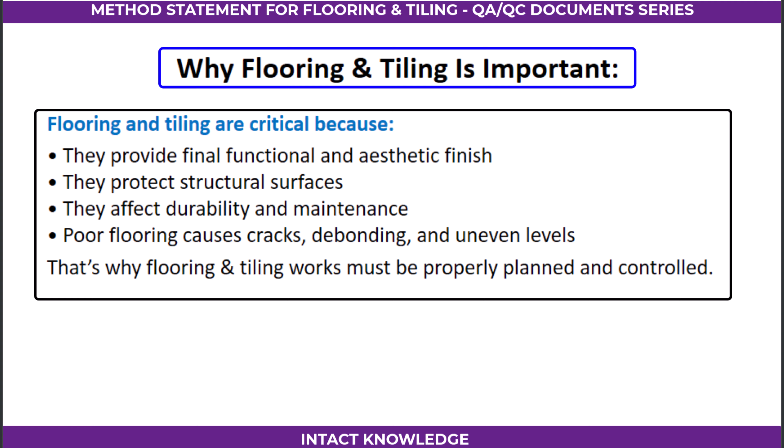What is a method statement? A method statement is a written document that explains how a construction activity will be carried out, sequence of work, safety and quality controls, responsibilities of personnel. It ensures controlled and safe execution of work.

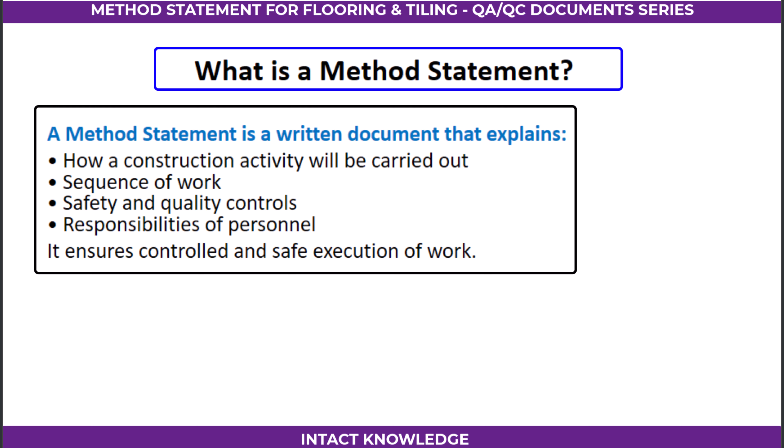What is flooring and tiling? Flooring and tiling is the process of installing ceramic, porcelain tiles, marble, granite, vinyl, other specified finishes on floors and walls to achieve durable and level surfaces.

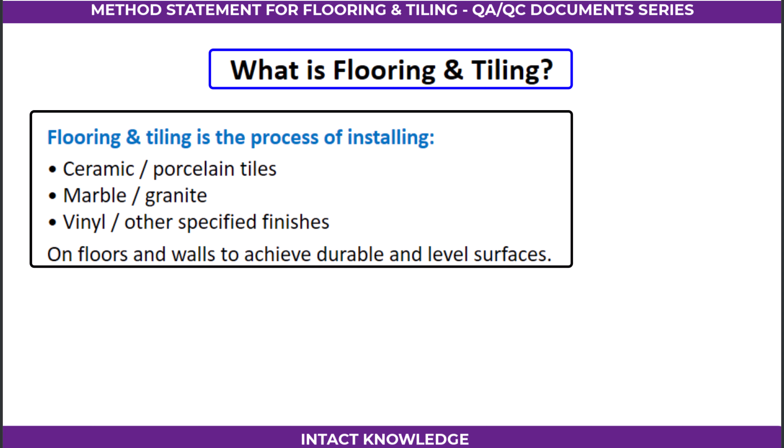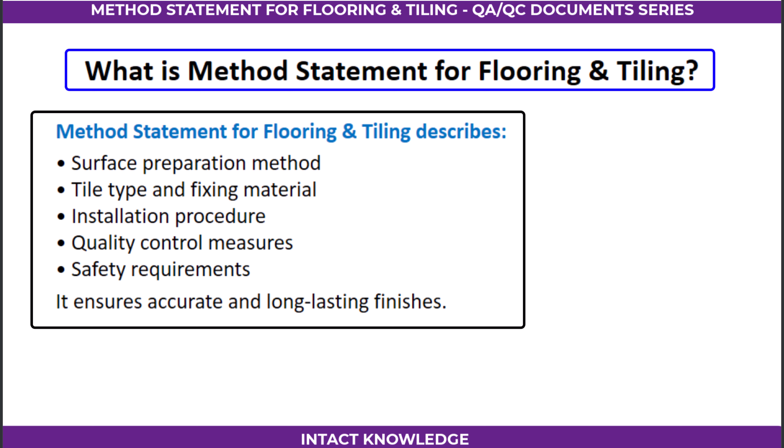What is method statement for flooring and tiling? Method statement for flooring and tiling describes surface preparation method, tile type and fixing material, installation procedure, quality control measures, safety requirements. It ensures accurate and long-lasting finishes.

Objective of flooring and tiling method statement. Main objectives are achieve proper level and alignment, ensure strong bonding, maintain uniform joint spacing, prevent cracks and hollow sounds, meet project specifications.

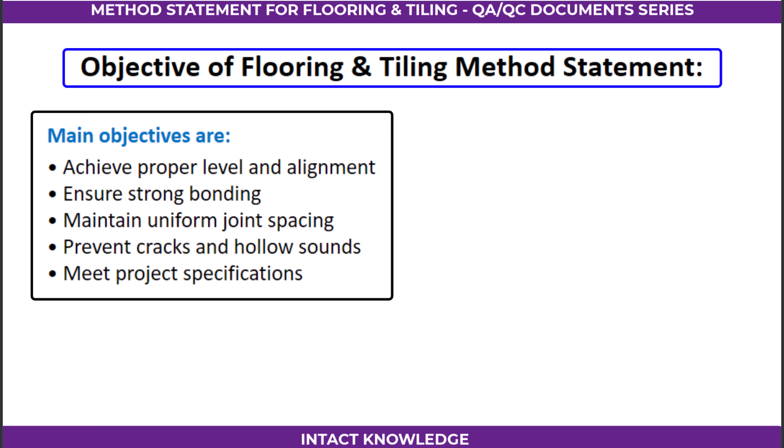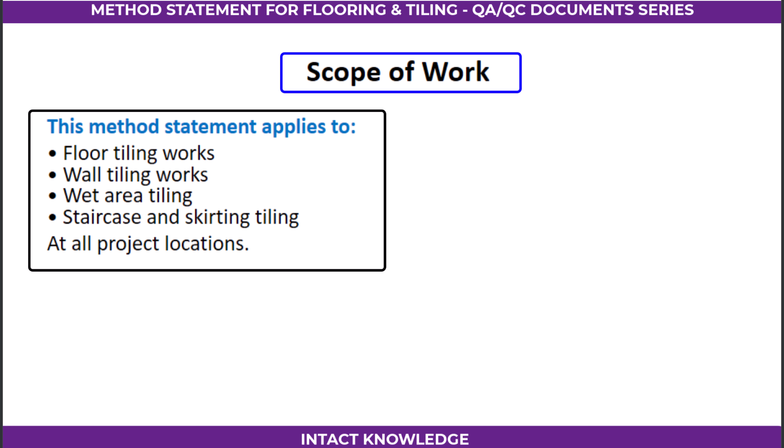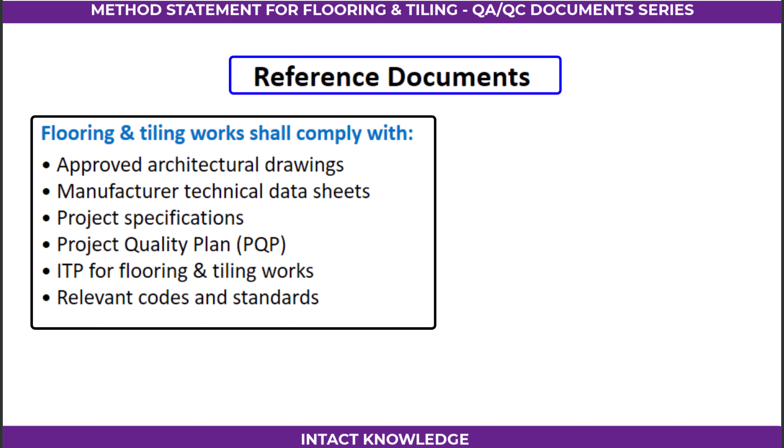Scope of work. This method statement applies to floor tiling works, wall tiling works, wet area tiling, staircase and skirting tiling at all project locations. Reference documents. Flooring and tiling work shall comply with approved architectural drawings, manufacturer technical data sheets, project specifications, project quality plan, PQP, ITP for flooring and tiling works, relevant codes and standards.

Responsibilities. Responsibilities include project manager, overall coordination; site engineer, execution and supervision; QA/QC engineer, inspection and compliance; safety officer, safety monitoring; flooring tiling supervisor, work control.

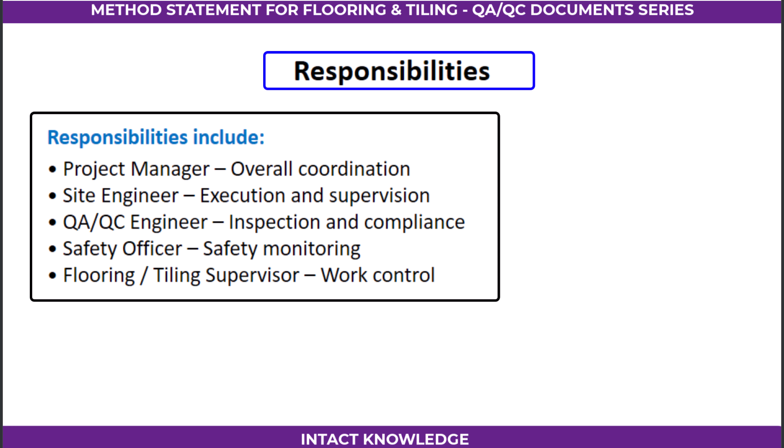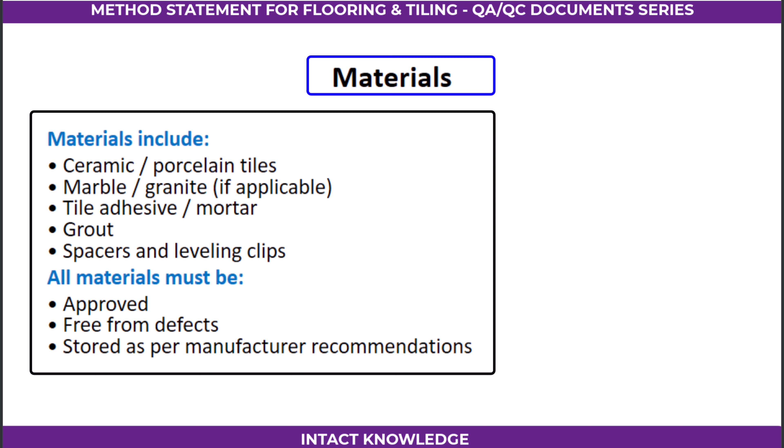Materials. Materials include ceramic porcelain tiles, marble, granite if applicable, tile adhesive mortar, grout, spacers and leveling clips. All materials must be approved, free from defects, stored as per manufacturer recommendations. Plant and equipment. Typical equipment used: tile cutter, mixing tools, trowels and floats, spirit level and straight edge, rubber mallet. All equipment shall be inspected, clean, safe to use.

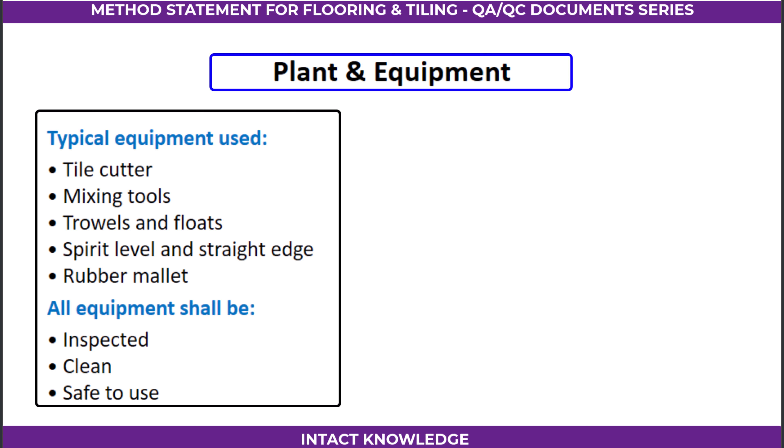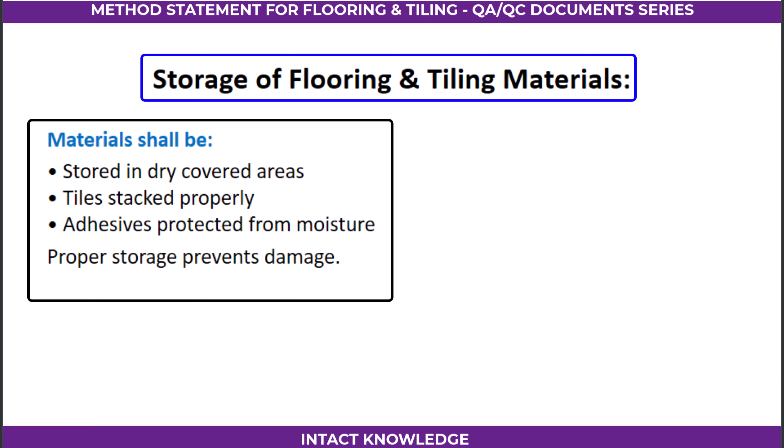Storage of flooring and tiling materials. Materials shall be stored in dry covered areas, tiles stacked properly, adhesives protected from moisture. Before tiling, ensure surfaces clean and dry, levels checked and corrected, waterproofing completed, if applicable, reference lines marked. Good preparation ensures proper bonding.

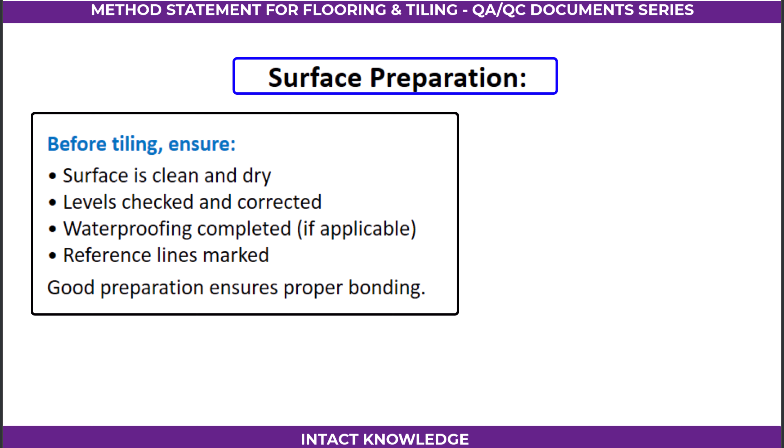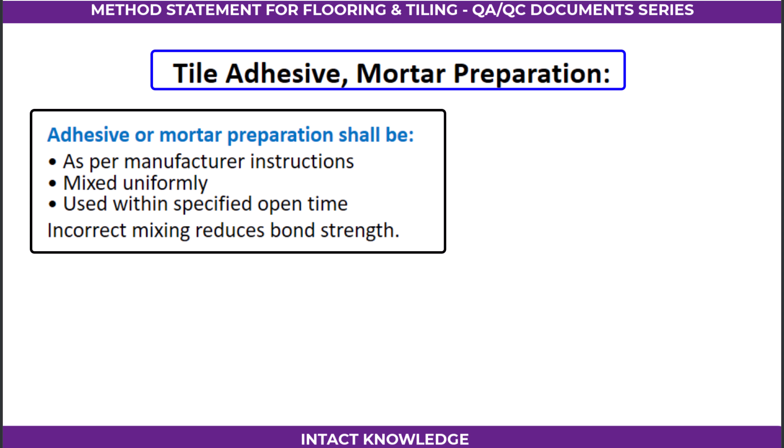Tile adhesive/mortar preparation. Adhesive or mortar preparation shall be as per manufacturer instructions, mixed uniformly, used within specified open time. Incorrect mixing reduces bond strength. Tile installation procedure. Tiling work shall be carried out as follows: adhesive applied evenly, tiles laid as per approved pattern, spacers used for uniform joints, levels and alignment checked continuously.

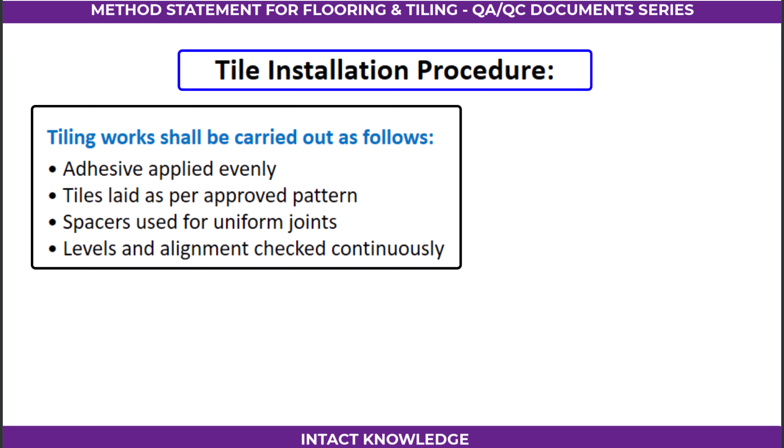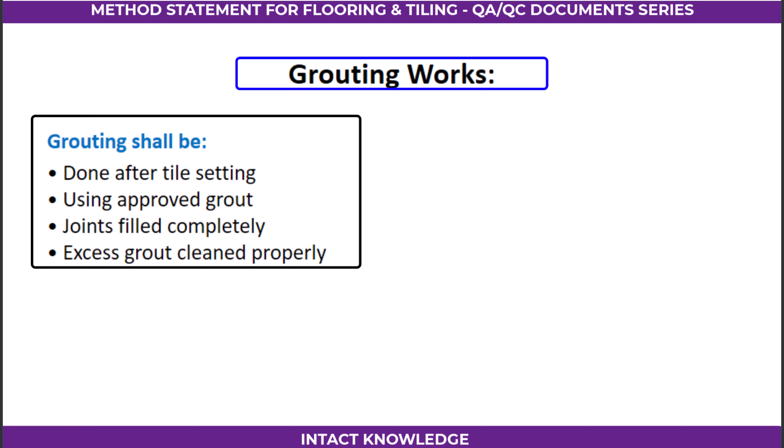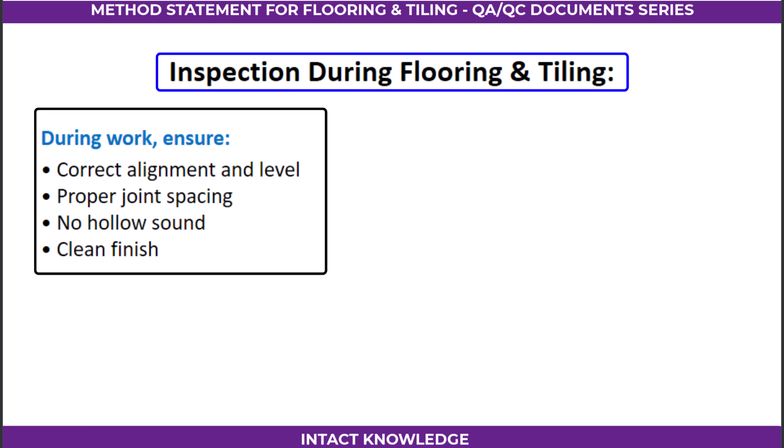Grouting works. Grouting shall be done after tile setting using approved grout, joints filled completely, excess grout cleaned properly. Curing and protection. Ensure adequate curing time, no traffic during curing, finished surfaces protected. Inspection during flooring and tiling. During work, ensure correct alignment and level, proper joint spacing, no hollow sound, clean finish.

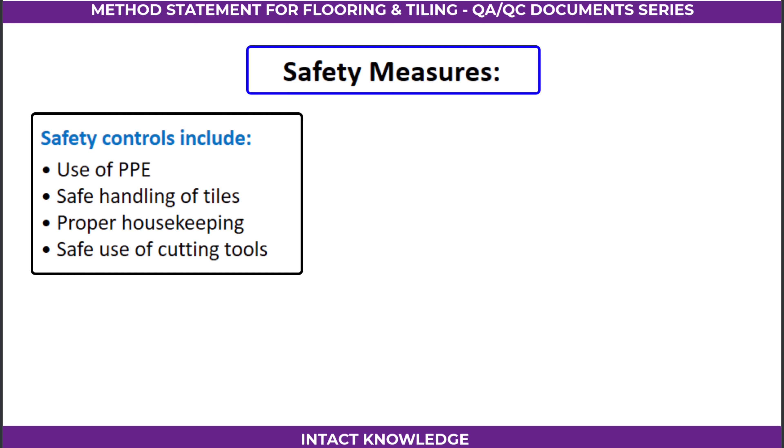Safety measures. Safety controls include use of PPE, safe handling of tiles, proper housekeeping, safe use of cutting tools. Quality control measures. Quality checks include material approval, surface preparation inspection, level and alignment checks, bond strength and hollowness check, QA/QC approval.

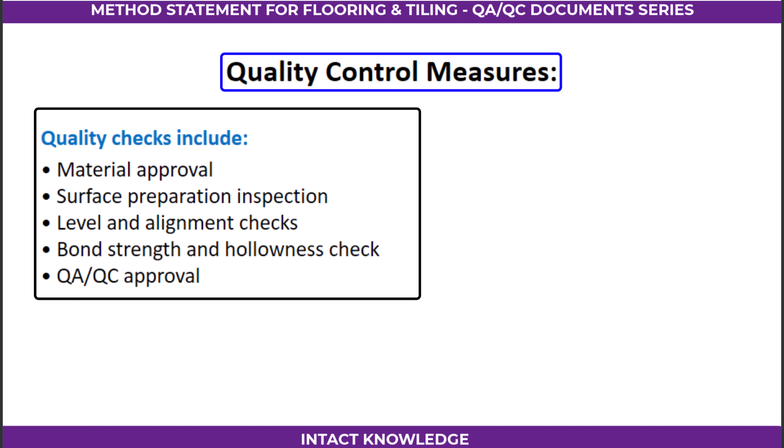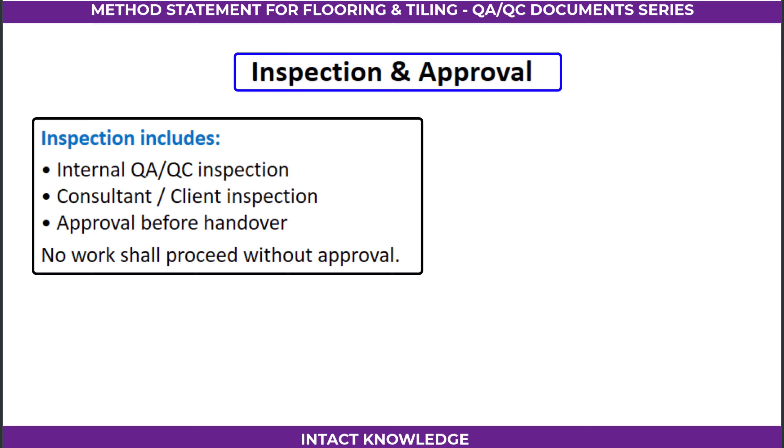Inspection and approval. Inspection includes internal QA/QC inspection, consultant client inspection, approval before handover. No work shall proceed without approval. Records maintained. Records include flooring and tiling inspection request, material approval documents, checklists, approval records.

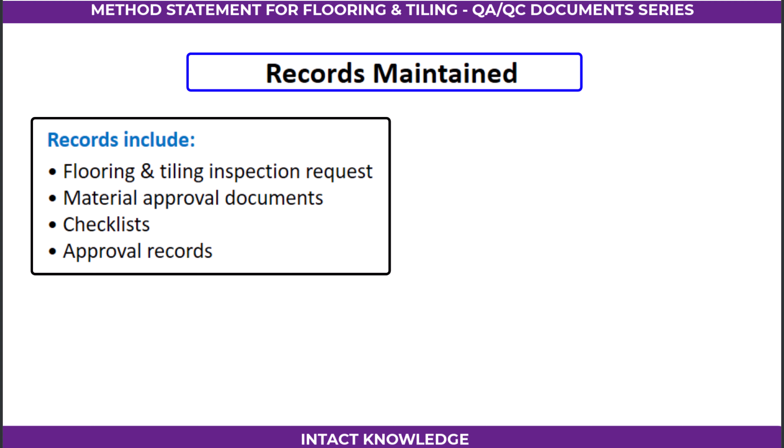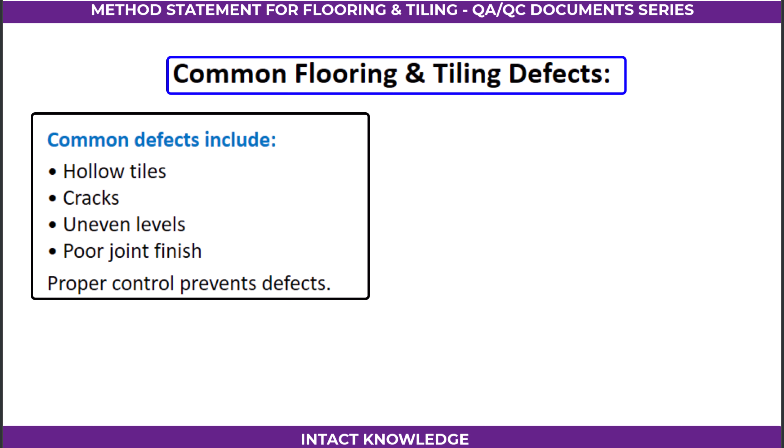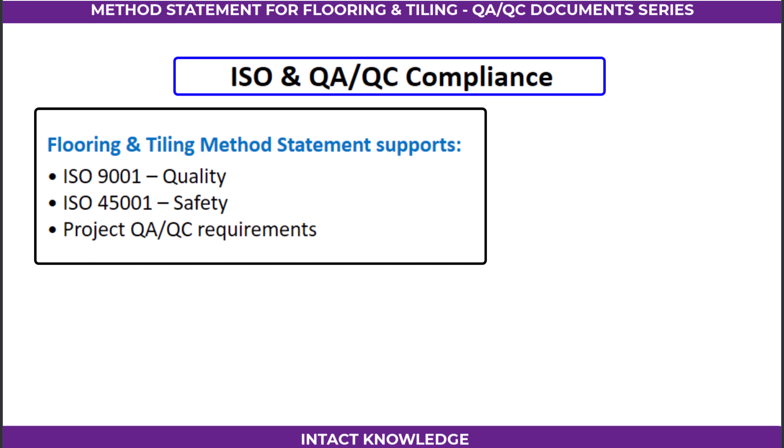Common flooring and tiling defects. Common defects include hollow tiles, cracks, uneven levels, poor joint finish. Proper control prevents defects. ISO and QA/QC compliance. Flooring and tiling method statement supports ISO 9001 quality, ISO 45001 safety, project QA/QC requirements.

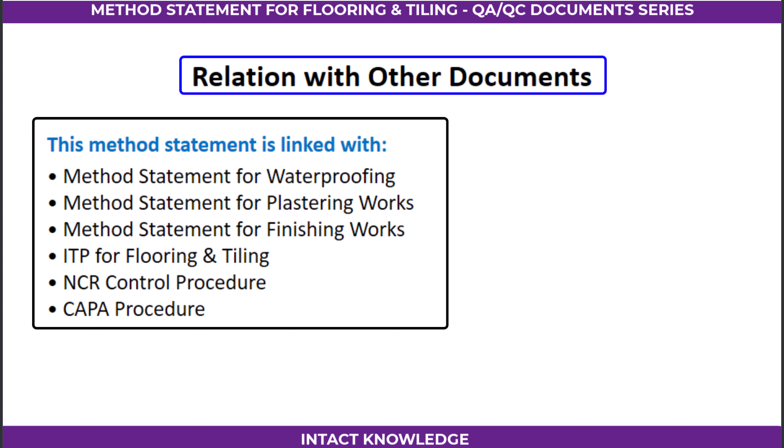Relation with other documents. This method statement is linked with method statement for waterproofing, method statement for plastering works, method statement for finishing works, ITP for flooring and tiling, NCR control procedure, CAPA. Conclusion. Method statement for flooring and tiling ensures accurate and durable finishes, quality compliance, reduced defects, safe and controlled execution.